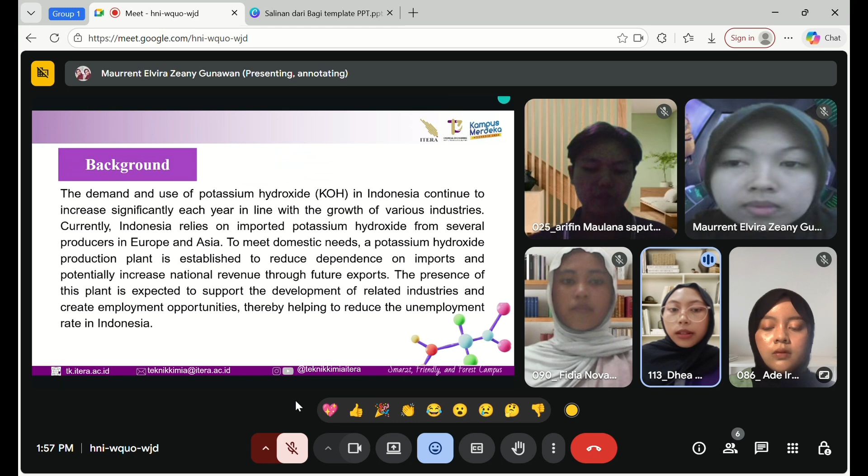Definition: Potassium hydroxide is an inorganic compound commonly known as caustic potash, potassium hydrate, or potassium hydroxide. It is a strong base widely used in the chemical industry as a pH controller and supporting reagent in various production processes. Potassium hydroxide was first isolated by Sir Humphrey Davy through electrolysis, and the term 'kalium' originates from the Arabic word al-qaliy, meaning alkaline ash. Kalium hydroxide serves as an essential raw material in the production of fertilizer, soaps and detergents, alkaline batteries, agrochemicals, textiles, and various potassium-based compounds.

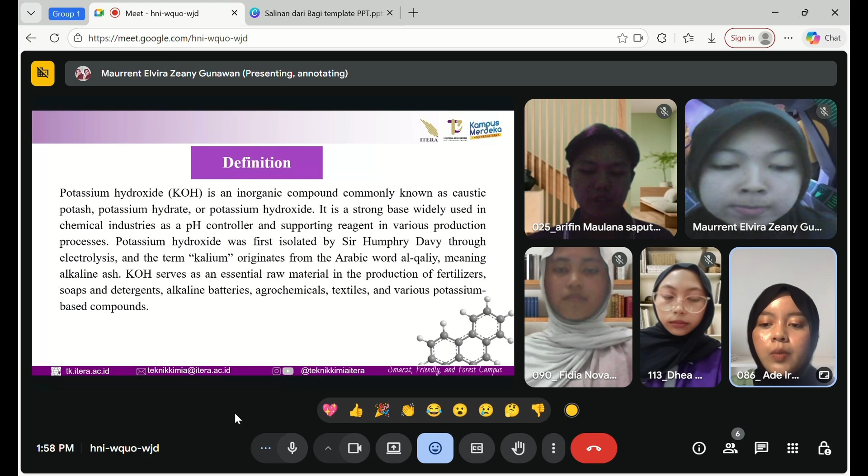I will explain the main chemical reaction involved in the production of potassium hydroxide. KOH is produced through the electrolysis of a potassium chloride solution using a membrane cell. The overall reaction is: 2 KCl + 2 H2O → 2 KOH + Cl2 + H2. At the anode, chloride ions are oxidized to form chlorine gas while releasing 2 electrons. At the cathode, water molecules accept electrons, producing hydrogen gas and hydroxide ions. Finally, potassium ions combine with hydroxide ions to form the main product, KOH. Thanks to the membrane separation, ion crossover is minimized, allowing the process to produce high-purity potassium hydroxide.

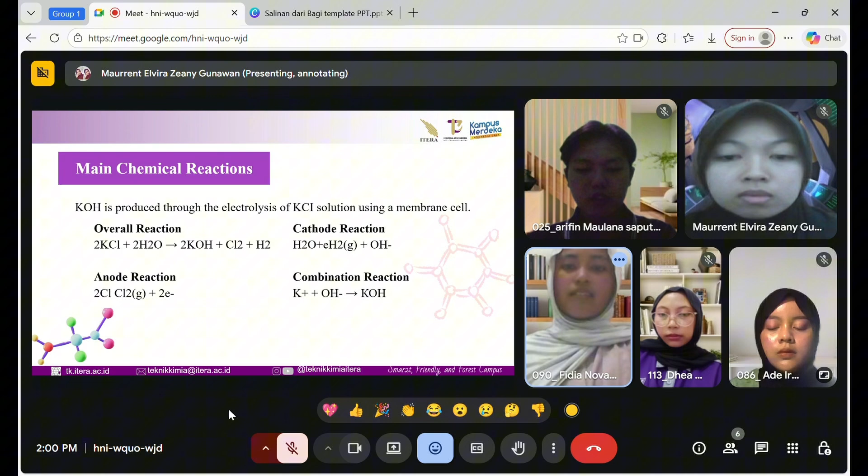In the raw material handling step, solid potassium chloride delivered by truck is transferred to the storage area or directly to the dissolver hopper. This transfer is carried out using belt conveyor BC01, which ensures a continuous and stable feed of KCl into the process. BC01 operates with a capacity of 3.8371 tons per hour, a belt width of 14 inches, and a belt speed of 100 feet per minute. It has a 2-degree elevation angle and is powered by a 36 horsepower motor. This specification allows BC01 to maintain smooth material flow, prevent buildup, and ensure that the feed entering the dissolution stage remains consistent and reliable.

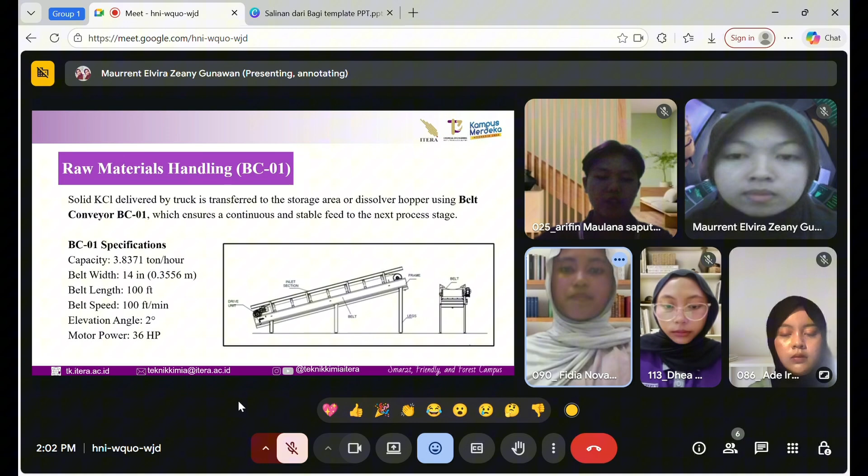The process flow diagram I will explain is the PFD of our plant design, for the production of potassium hydroxide from potassium chloride using an electrolysis process with a capacity of 25,000 tons per year. In the process shown on the screen, the raw material, potassium chloride, is fed into a mixer using the belt conveyor to combine the potassium chloride with water, forming a potassium chloride solution. The mixer used in this step is a vertical cylindrical mixer equipped with an agitator and a torispherical bottom.

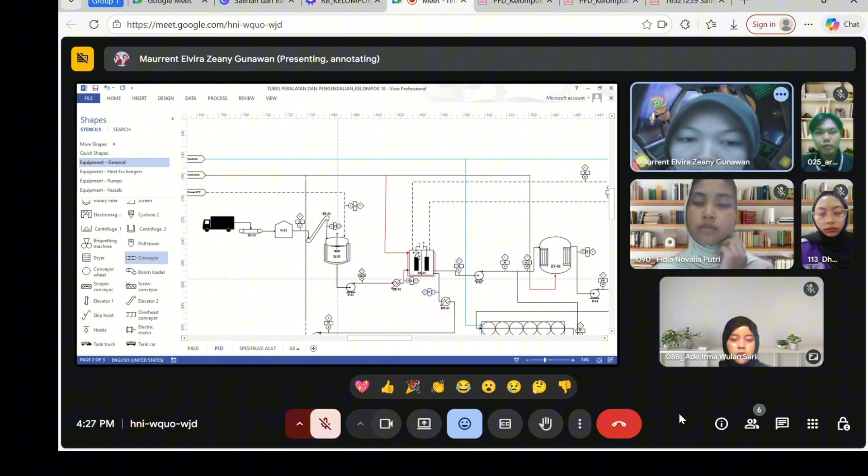After the potassium chloride solution is obtained, it is pumped into the reactor, where potassium chloride reacts with water to produce potassium hydroxide. The reactor used in this stage is an electrolytic reactor. In this electrolysis process, chloride ions (Cl-) are oxidized at the anode, while at the cathode, water undergoes reduction to produce hydroxide ions (OH-) and hydrogen gas.

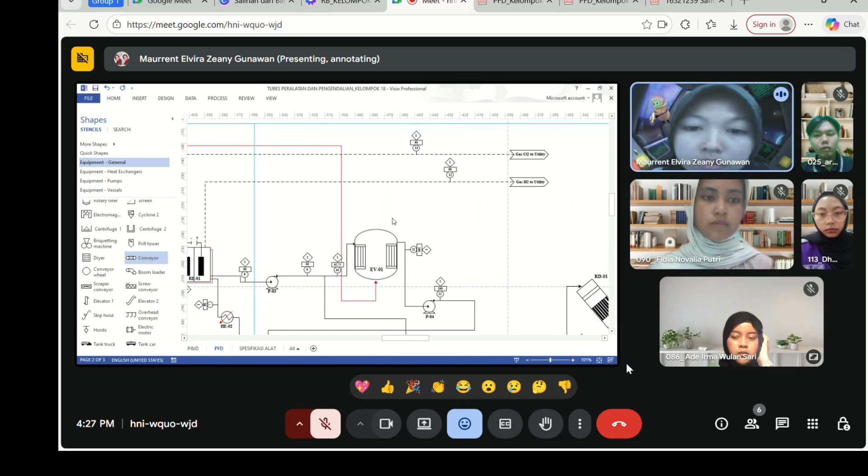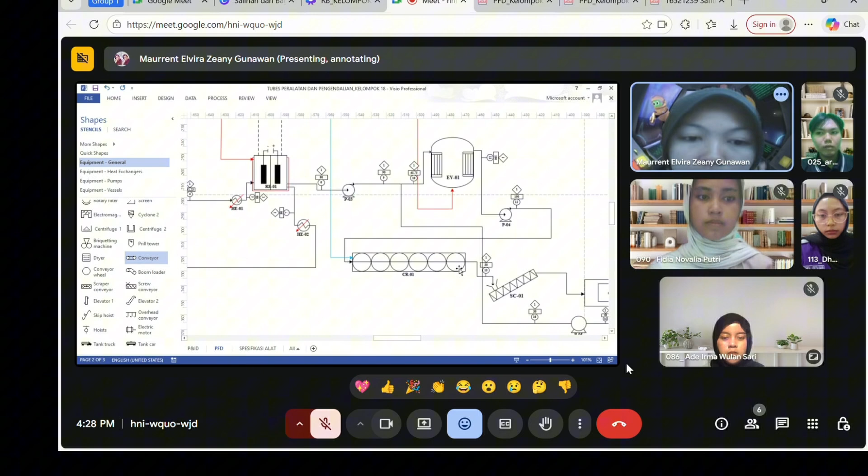After obtaining the potassium hydroxide solution, it is pumped into the evaporator. The concentrated solution leaving the evaporator is directed to the crystallizer, where further concentration occurs through evaporation and cooling, producing solid crystals. These crystals are transferred to the centrifuge separator using a screw conveyor to separate the solid from the remaining liquid. Any remaining liquid is pumped back to the upper pipeline to be processed again.

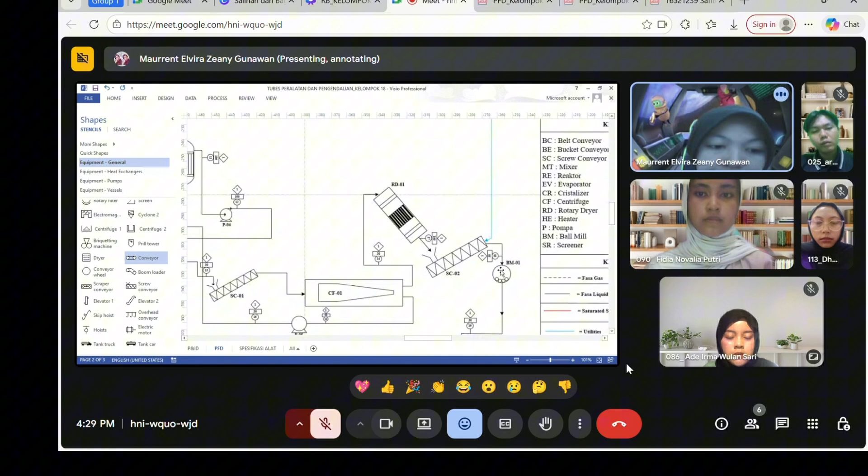After undergoing the process in the centrifuge separator, the solid product is transferred to the rotary dryer for drying. Next, the solid product is ground into smaller particles using a ball mill, then transferred using a screw conveyor. After this step, the final product, potassium hydroxide or KOH in solid form, is obtained. The product is then ready to be packaged and distributed to the market.

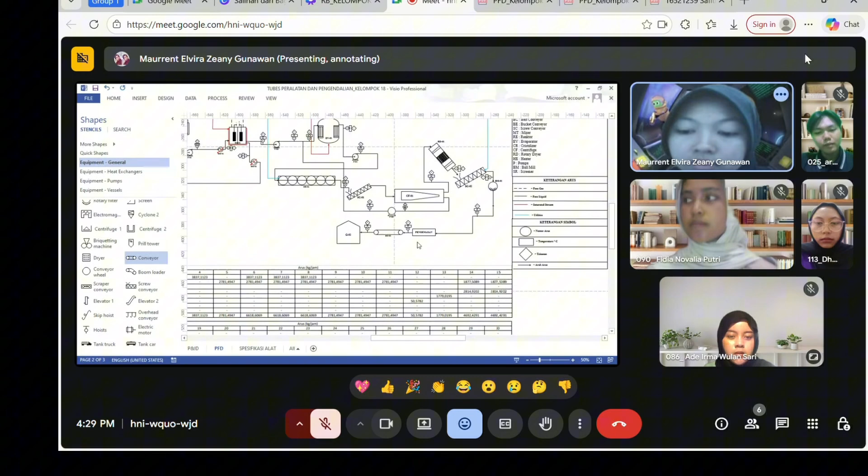Conclusion: the construction of a potassium hydroxide plant using the electrolysis process makes an important contribution to meeting national industrial needs while reducing import dependence. Through the P&ID design, the entire process flow from brine purification, electrolysis, concentration, crystallization to drying has been integrated with instrumentation and control systems that ensure safe and efficient operation. The use of supporting equipment such as conveyors plays a vital role in continuously transferring material between unit operations, maintaining the smooth flow of solid materials, and improving product handling efficiency. With this integrated process design, the plant is capable of producing high-quality KOH and achieving strong industrial competitiveness.